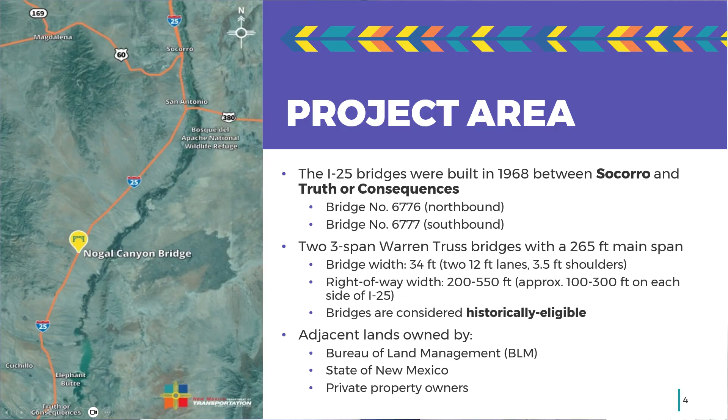The lands surrounding the bridges are owned by the Bureau of Land Management, the state of New Mexico, and several private property owners. There is consistent traffic along this corridor. It is estimated over 1 million trucks and over 4 million vehicles pass over the Nogal Canyon bridges every year.

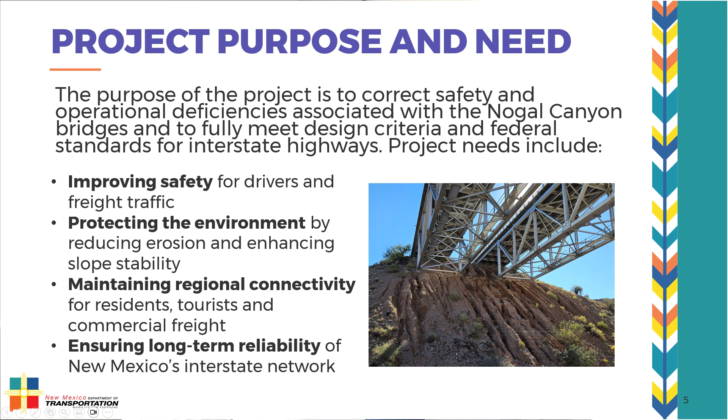This project is important for several reasons: improving safety for drivers and freight traffic, protecting the environment by reducing erosion through enhanced slope stability within the Nogal Canyon, maintaining regional connectivity for residents, tourists, and commercial freight, and ensuring long-term reliability of New Mexico's interstate network. I-25 is a critical connector between Socorro, Truth or Consequences, and statewide travel. Updating this corridor for long-term reliability is essential for residents, freight, and emergency response.

This is the most recent step in this project. The study process follows the NMDOT's location study procedures, starting all the way back in 2018. A combined Phase 1A, 1B report was prepared in 2020. 8 preliminary bridge concepts were examined in the Phase 1A initial evaluation of alternatives. From there, 7 refined bridge concepts were further examined and developed in the Phase 1B detailed evaluation of alternatives.

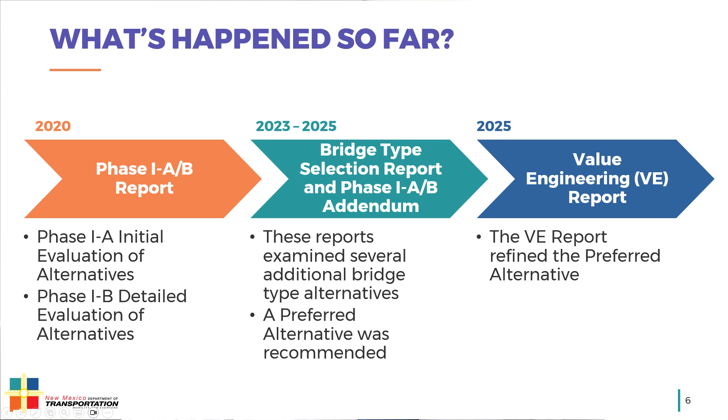A final bridge type selection report and Phase 1AB addendum was prepared in 2023, wrapping up earlier this year in 2025. These reports examined several additional bridge type alternatives. A preferred alternative was recommended in the Phase 1AB addendum. Because of the scale of the project, a value engineering report, also known as the VE report, was prepared in the fall of 2025. The VE report refined the preferred bridge alternative to improve constructability, driver safety during construction, and to reduce overall project costs. The VE preferred bridge alternative will be carried into environmental documentation, final design, and construction.

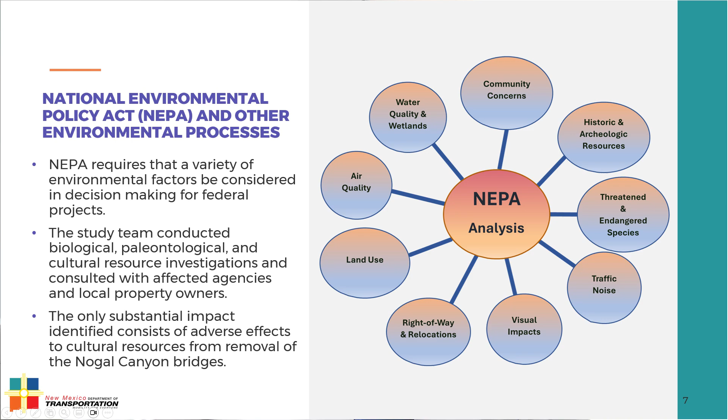This project is governed by the National Environmental Policy Act, otherwise known as NEPA, which specifies which environmental factors are to be considered during decision-making for federal projects. NEPA looks at factors like visual impacts, air quality, community concerns, and land use when reviewing federal projects. Projects are given a rating to determine how impactful they may be to the surrounding environment and communities. In past phases, the study team conducted preliminary analysis in these areas and will continue to work under the federal process. It is expected that a categorical exclusion will be prepared to authorize final design and construction.

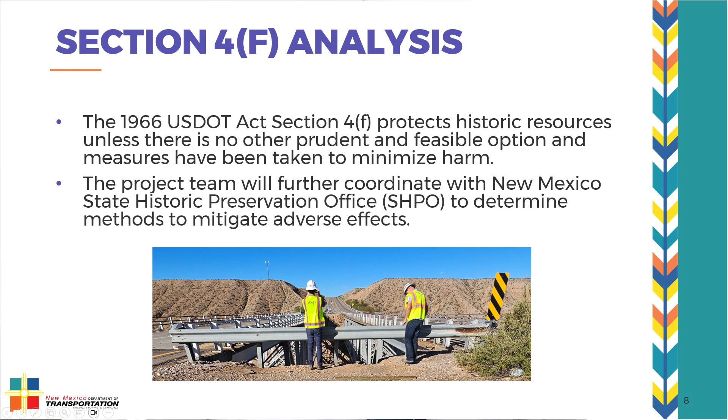The bridges are considered historically eligible for the National Register of Historic Places and were placed on the final list of nationally and exceptionally significant features of the federal interstate highway system. The bridges must be treated in accordance with Section 106 of the National Historic Preservation Act. Thus, measures to mitigate adverse effects must be evaluated in consultation with the State Historic Preservation Office, otherwise known as SHPO. The Section 4(f) analysis is ongoing and will continue to evaluate the potential adverse effects of the bridge removal. This coordination with SHPO will be continued throughout the project.

When first evaluating these bridges, the team collected existing condition data, developed 9 preliminary bridge alternatives, and then narrowed this list down to the most viable options for detailed analysis. The alternatives carried forward for further evaluation included constructing new bridges, either by replacing the bridges or placing new bridges alongside the existing bridges, retrofitting or rehabilitating the existing bridges, removing the bridges and installing culverts in the canyon below, or taking no action, also called a no-build alternative.

The analysis found that retrofitting or rehabilitating the existing bridges would not meet modern design standards. It would also compromise the bridge's historic integrity and result in a shorter design life than other options. This would also not meet the project's purpose and need, so it was considered not a good use of funding or time. A culvert option was also removed from the list as it had significant environmental impacts to the canyon below, and it would not meet the purpose and need as effectively as other options considered.

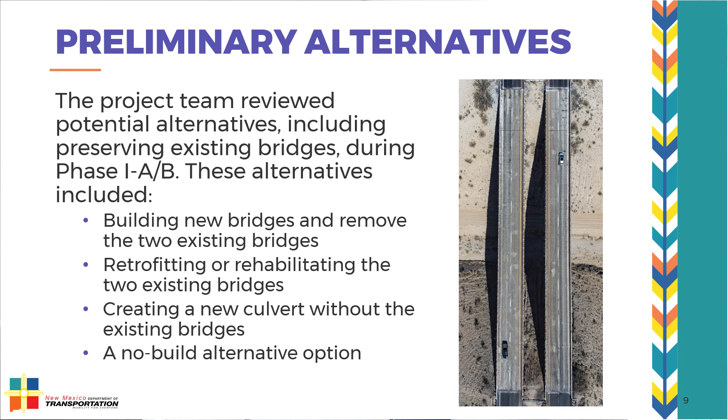The evaluation of a no-build option also showed that there would be ongoing significant maintenance costs and would require the eventual complete rehabilitation or replacement of the existing bridges. This resulted in this option not being considered a good use of funding or time. Overall, constructing new bridges was considered the best option. It would meet modern design, safety, and road standards while meeting the purpose and need, and would be the most efficient use of funding and time.

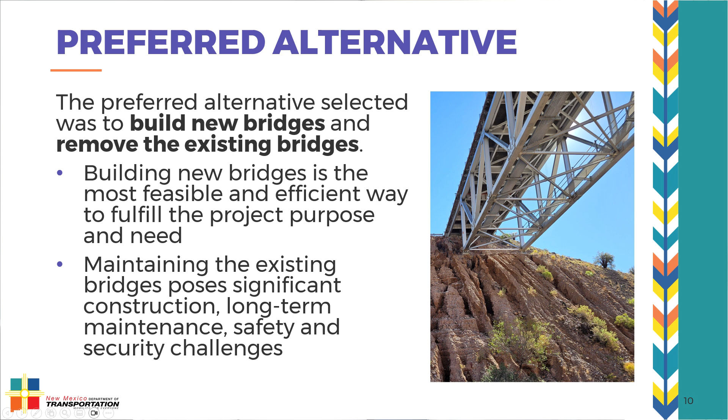The project team also reviewed potentially leaving the existing bridges in their current location and building around them. However, the team recommends removing the existing bridges for a few reasons. Completing the construction of new bridges around the old bridges will be difficult and costly. Maintaining the old bridges will be a long-term cost with little return on investment. Additional investment would also be required to address safety or security concerns, such as adding fences or security patrols to prevent trespassing on the existing bridges.

Now, we'll get into more detail about what's being proposed. After evaluating different design options, the project team selected a value engineered solution that keeps most construction activity out of the canyon itself by utilizing an innovative single-span cast-in-place segmental bridge. This will be the second bridge of this type in this state. Another key solution is to utilize retaining walls to reduce right-of-way impacts to BLM and state lands. This approach also simplifies construction and lowers overall project costs through reductions in earthwork.

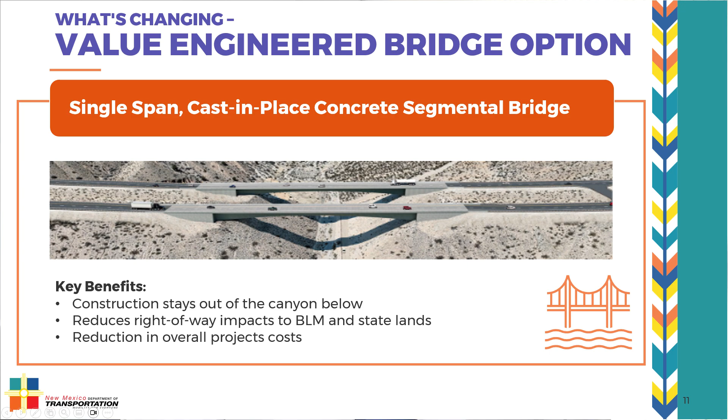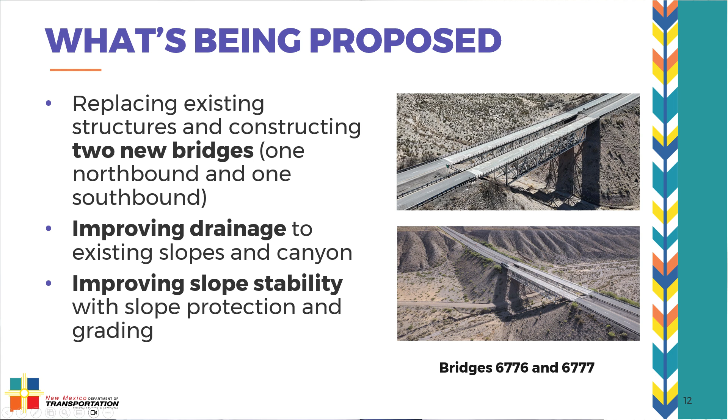Slope stability through the canyon will also be improved through enhanced bank protection, which will protect the structure while reducing maintenance costs. As we mentioned, the project will replace the existing bridges and will bring the corridor up to modern safety standards. This will keep the traveling public safe and ensure the movement of people and goods along the I-25 corridor. The project will also improve key features such as stabilizing the slope areas around the bridge, mitigate the risk of erosion through the canyon, and improve the drainage systems of the roadway to reduce maintenance costs in the future.

Let's talk about next steps. Our preliminary design development will be underway this winter, with final design planned for summer of next year. Your feedback now and in early spring of 2026 will be important. Please let us know any feedback or concerns that we should address with our design team next year. After design is completed late next year, the DOT will select a contractor with construction anticipated to start in early 2027.

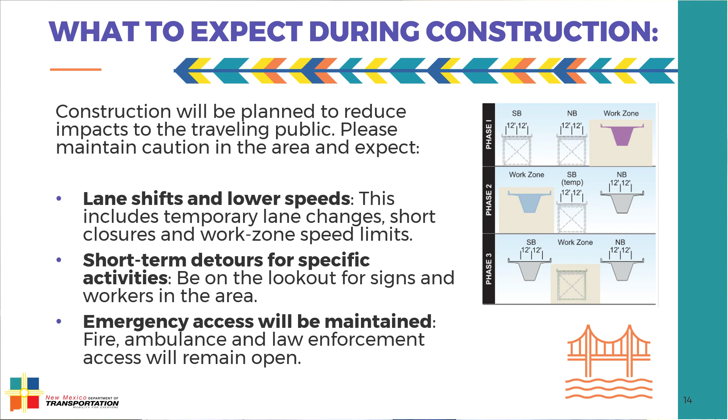During construction, I-25 will stay open, but drivers will see some changes in how traffic moves through the work zone. Lanes will shift at times and speed limits will be reduced to keep crews and the traveling public safe. Short-term closures or detours may be needed for specific construction activities. However, don't worry, these will always be communicated in advance, and emergency access will always be maintained. You may also notice temporary barriers, signs, and work zone technology guiding traffic through the canyon. Overall, the goal is to keep you moving while the new bridges are built safely and efficiently.

We're looking forward to your feedback on this project and what considerations we should have both in design and in construction. Please submit your feedback online at the project webpage bit.ly/NMDOT Nogal, or send in your comments via email at haley.steffens@wsp.com. Please submit all of your comments by December 21st, 2025.

Thank you for taking the time to learn about the I-25 Nogal Canyon Bridge Replacement Project. We look forward to hearing from you and having your involvement and continued input on this exciting project as we move forward.